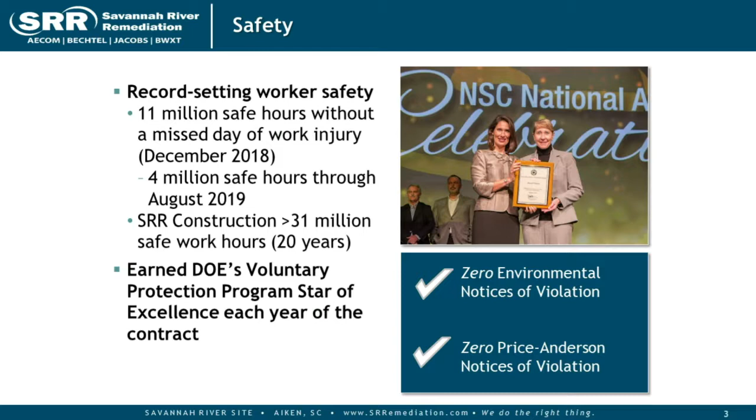This is your placemat. So I don't want to make James a liar. It's in my presentation.

So this really is our mission. And our mission is really these waste tanks, the management and oversight and the safety of those. We store 35 million gallons of high-level waste. That's a product of fuel dissolution from the canyons that was done during the Cold War. Our goal is to take all or almost all of the radioactivity from those 35 million gallons of waste, high-level waste that we store, and try to get it in glass. The most safe waste form that we have.

It's not a perfect process, so some of it will stay in the tanks and be closed with the tanks, and some of it is kept with the liquid form and will be disposed of as a grout in the saltstone facility. But that's basically our mission, is safely storing it, removing the radionuclides, and putting it into glass.

So 51 tanks were built in the history of the site, starting with the first tank being put into service in 1954. 8 of those tanks have been taken out of service and formally closed, 6 of those were grouted and closed under the current contract we have. That leaves 43 tanks that are operational and in use in the facilities for processing.

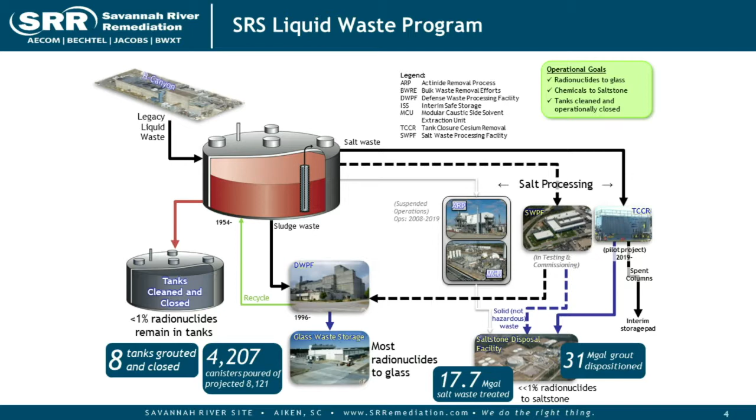The second part of the process is what we call modular caustic side solvent extraction, or MCU. That's a liquid-liquid extraction process that uses a couple of chemicals to actually grab hold of the cesium, remove it from the radioactive material, and that concentrated solution goes on to DWPF for placement in glass.

That process was just shut down this past year. It's all in preparation, getting ready for SWPF, because all the lines we use for MCU and ARP now have to be attached to the salt waste processing facility. So that's our big focus right now, getting ready for SWPF.

SWPF has exactly the same function as ARP MCU, except it's really supersized. Whereas this facility produced anywhere from 700,000 to 1.3 million gallons of decontaminated salt solution every year, you can expect SWPF to do 7, 8, 9 million gallons a year once it gets up to full operation.

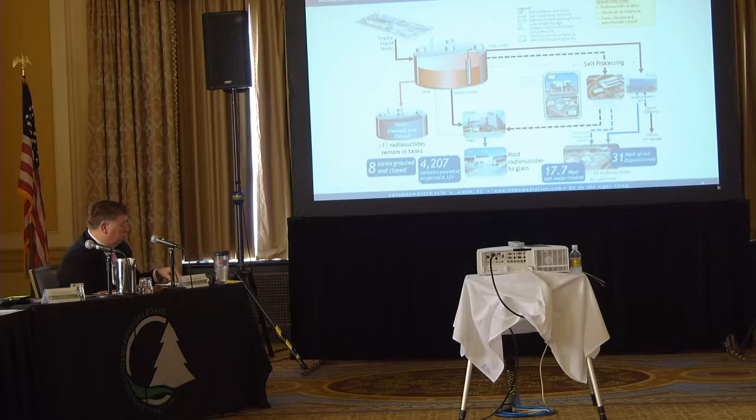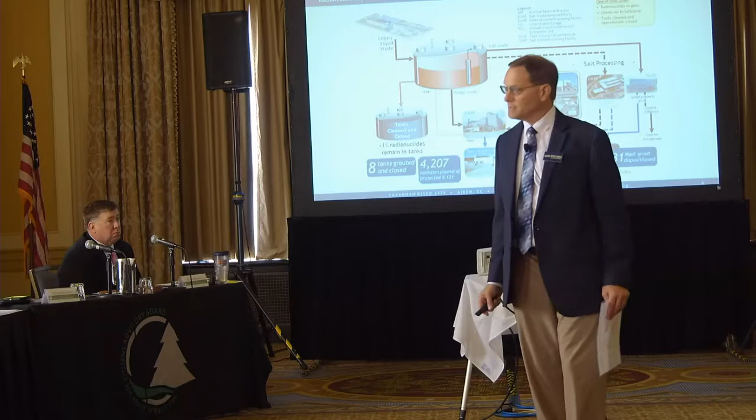As an alternative to both liquid extraction processes, MCU, ARP, and SWPF, we just this year started up a test bed using an ion exchange resin called CST, or crystalline silicon titanate. We have way too many acronyms.

The ion exchange resin grabs hold of the cesium and removes it much in the way the liquid-liquid extraction process does. We're putting it on that resin and getting a decontaminated salt solution, which also goes on to the saltstone facility. For the time being, our plan is to store that resin on site.

Eventually it will have one of two paths, probably. The resin will be sluiced up and put into the DWPF glass, or if possible, if it would be considered a low-level waste, it could be shipped off-site to a low-level waste repository. That's a potential.

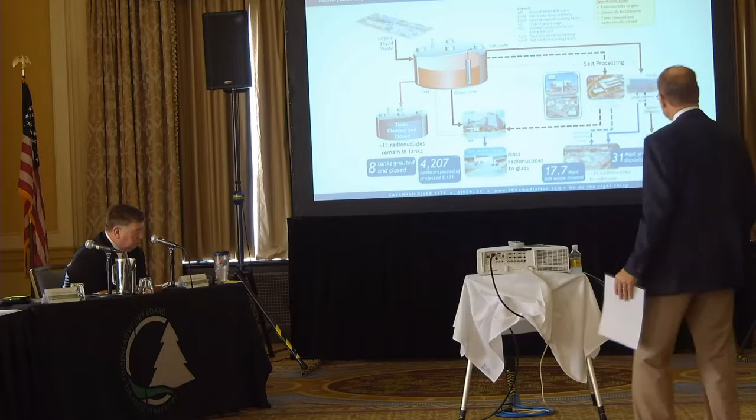So some might ask, why are you doing this? Being an ops guy, it is always best to not put all your eggs in one basket. It's good to have multiple options for processing material, particularly in the radioactive waste business.

There have been 4,200 canisters produced to date. The projection to finish the program is just about 8,100, so we're basically halfway through the operational life of DWPF, if you will.

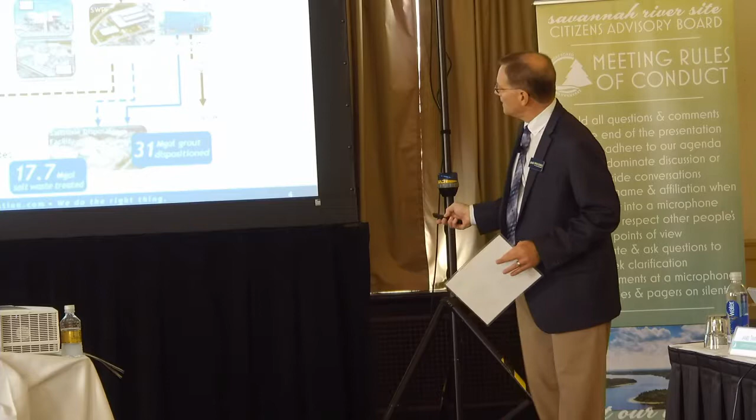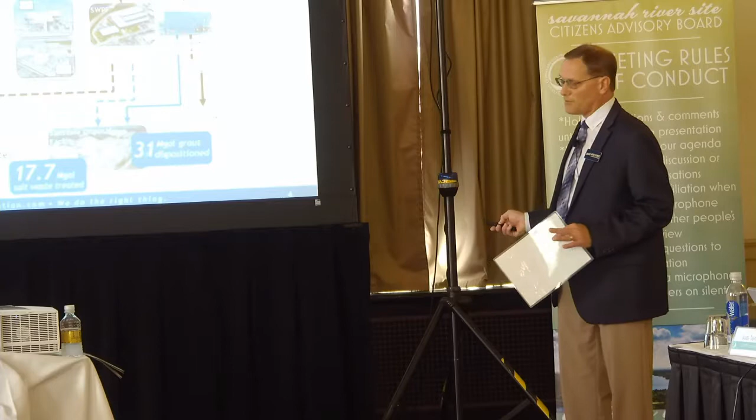The glass canisters are stored in the glass waste storage building, I'll talk more about that. The decontaminated salt solution goes to our saltstone disposal facility. We've processed over 17 million gallons of salt that's put into a grout form, and that 17 million gallons of salt solution becomes about 31 million gallons of solid grout.

The first facility I'll give you an overview on is DWPF. As I mentioned, it's produced 4,200 canisters, about 1,460 under this particular contract, and poured over 6 million gallons of vitrified waste. During this contract, we've had a year of about 330 canisters of glass poured. So that's the production capability of DWPF.

That was mostly a sludge-only feed. Mike mentioned that we've only processed 35 canisters this year. There are big reasons for that. Most of the year has been an outage year, getting ready for SWPF tie-ins. And we're also in a phase where, since we've processed so much sludge, we want to match the remaining sludge with the remaining salt feed that we have.

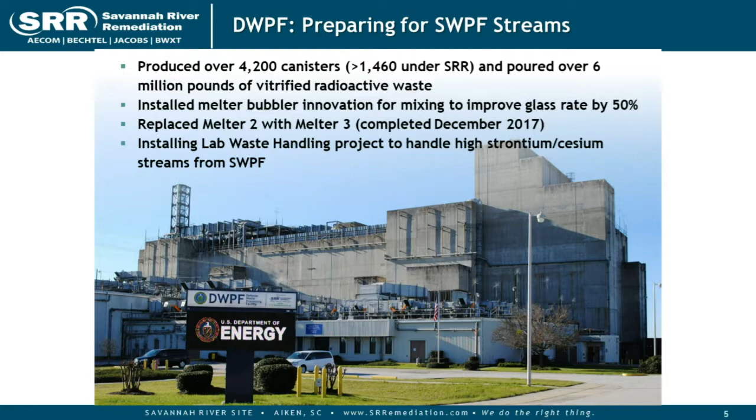So we want to do that side by side with the same amounts of material so that we maintain the glass formulation and glass quality we have. If the salt gets too far out of kilter with the amount of sludge we have, we would probably have to do a slightly different glass frit formulation. So that's the reason for slowing down, to make sure we have enough sludge to match up with the salt feed we've got.

The biggest innovation over the last 10 years was the installation of the melter bubblers, and that's what got us to 330 canisters a year. It's a very simple idea: you take argon and bubble it down into the glass pool, which gives much better mixing in the melter and a much better melt rate, giving you a much better pour rate and getting you canisters faster. That was very simply done, and it was a very inexpensive addition to the melter.

And we change those out on a regular frequency to keep them viable.

There are multiple projects that we're doing in order to get ready for SWPF. I'll cover those real briefly. In our agenda, we've got a couple of presentations that will talk a little bit more about that. But we have the DWPF modifications project.

When you bring all that really concentrated cesium and strontium stream into DWPF, you have to be able to handle that. Anytime you bring a radioactive stream, radiation causes water to decompose. It's a very slow process, but it causes water to decompose, and you get hydrogen and oxygen. The hydrogen has to be removed so you don't have a flammable gas in your process, so you always have to have an air purge going. To handle this higher cesium and strontium concentration, we have to increase the air purges through our vessels in DWPF. That project did that in preparation for SWPF.

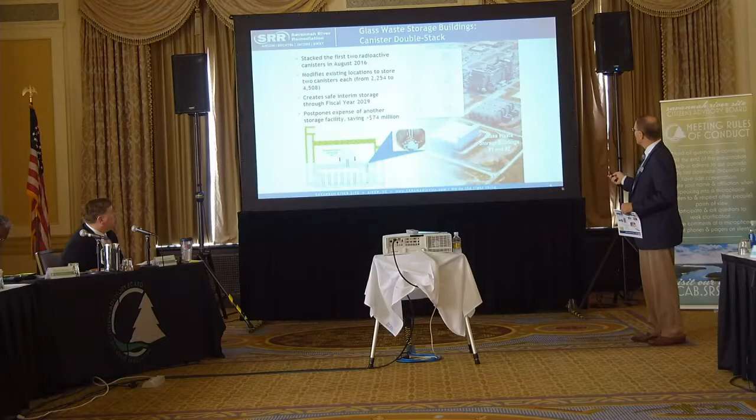Double stack is an innovation within itself. Here's DWPF, here's glass waste storage building number 1, and here's glass waste storage building number 2. In the original DWPF design, there were actually spaces designed for as many as 3 more buildings out here, so they designed it for up to well over 10,000 potential canisters.

We came up with a way to take the current design, which has 1 can in each slot, and there are about 2,500 spaces in each of the buildings, and actually put one can on top of the other. There's just enough room to do that and get the right amount of shielding on top. So it's a very simple thing we did, and we basically doubled the storage space in this building. Rather than having to build a new $130 to $150 million facility, we're able to save about half that cost and use that money to redesign each one of these so each hole can take 2 cans. We've saved over $74 million in taxpayer money with just that idea.

We're further looking at whether we can double stack in glass waste storage building number 2. However, it is a slightly different design. When they built it, they tried to reduce cost a little bit, which was a good idea at the time, but the building is about 8 inches shorter in height, which makes it very, very close when you go to double stack it. So we're looking at innovative things like maybe having a uranium depleted shield plug that would go over the second canister, so you wouldn't need a very big plug to shield it from the radiation. We think we can do it, but there's still some work to be done there.

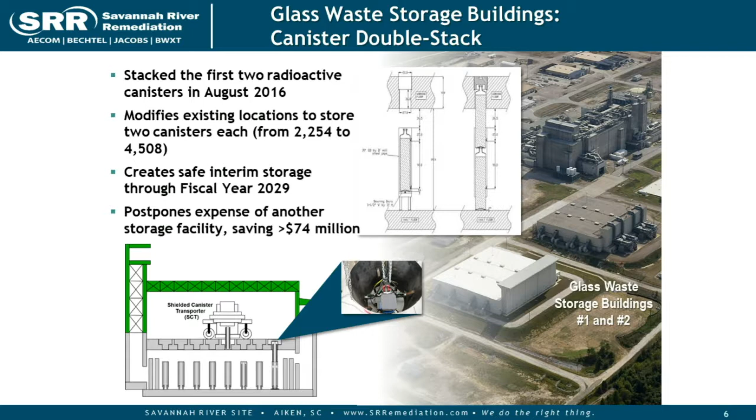ARP MCU has piloted everything that SWPF will do. All the processes in SWPF were done in ARP MCU, so everything in SWPF should work very well. It's not like starting up a first-of-a-kind facility in the Department of Energy complex.

It processed over 7.4 million gallons over its life. It was designed and built with the idea it would be a pilot facility operating for about 2 to 3 years. So we put 2 major life extensions into it to get the current operating life we got out of it, 10 to 11 years. To go any farther, we would have had to have another major shutdown and life extension to get another couple of years out of it.

So we thought at this time with SWPF so close, it's best to go ahead and shut it down, save the dose to the individual workers that would have had to refurbish it and bring it down, and declare success. So it has been a very successful campaign for ARP-MCU.

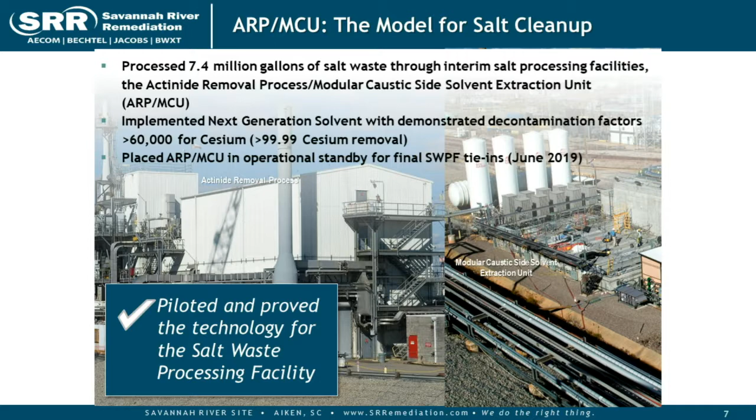The biggest innovation for ARP-MCU was changing the solvent to what was called the next generation solvent. We have a molecule, and I like to describe it, I'm a chemical engineer by background, but if you look at its physical shape, it looks like a baseball mitt. The cesium ion, it actually catches it in the mitt, and then you extract it later and put it in DWPF glass. So it catches it like that.

This calix molecule, as it's called, there's a new and improved version. We had what we called BOBCalix, and they went to something called MaxCalix. So instead of having DFs, decontamination factors, the amount of cesium you remove versus what's left behind, of 150 to 200, we improved the decontamination factor to over 60,000 with this new extraction process. That's over 4 nines removal of cesium from the radioactive waste.

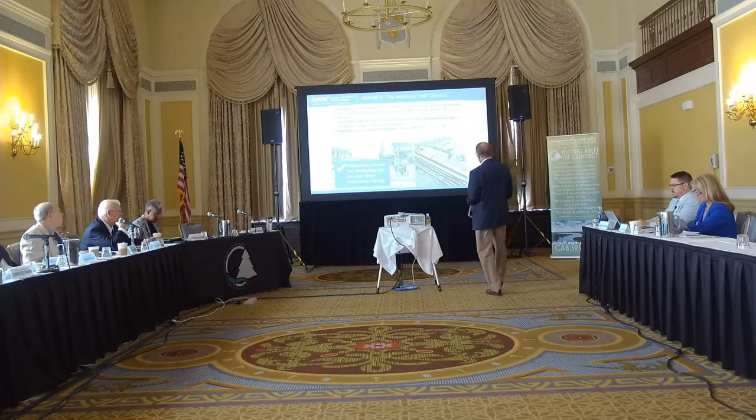So that's a very good innovation. We have officially placed ARP MCU in operational standby. It is still available for operation, however all the lines have been disconnected and now connected up to SWPF. So if something were to go seriously wrong with SWPF, we could reverse that process and hook it back up, but it would be quite an effort to get it back to that point.

This gives you a history on ARP MCU. I know this is probably hard to see from the back of the room, but originally the technology was designated in February 2004. In just over 4 years, the process started hot operations, which is outstanding for the DOE complex. It processed in total, as I said, 7.4 million gallons. And I think Mike mentioned in his opening comments that we celebrated 10 years in contract, and we also celebrated the successful operation of MCU.

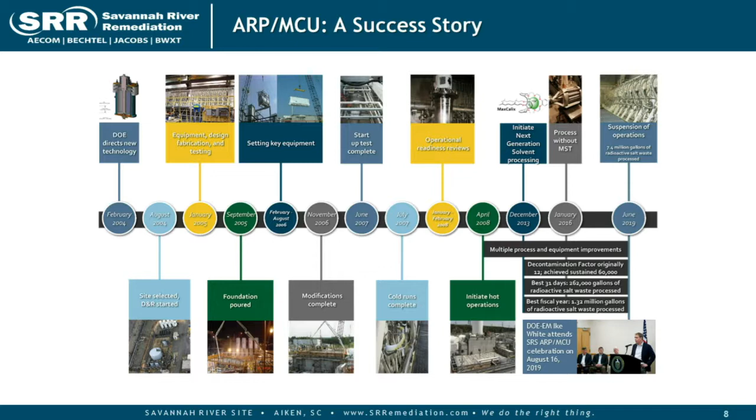Ike White, the EM advisor, was here to help us celebrate that.

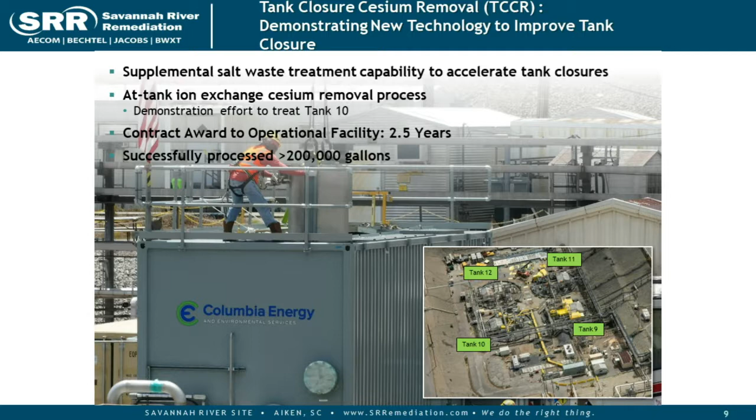So I mentioned TCCR, tank closure cesium removal, we call it TICR, is an ion exchange process. It duplicates some of the technology that was used to clean up wastewater at Fukushima. Ion exchange is a fairly mature technology; the resin is a fairly new thing as far as being used in nuclear service. Again, it's crystalline silicotitanate. It is an expensive resin, so you want to get as much cesium on it as you can.

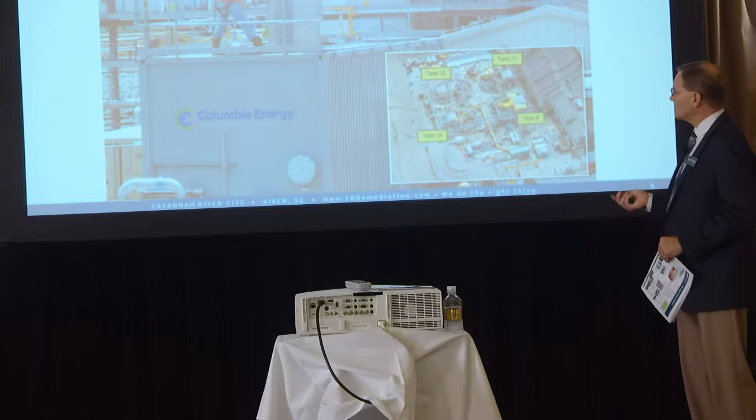With the technology as it developed at Fukushima, we felt we could bring something right to the side of the tank. So we had a vendor design this, what amounts to a Sealand container, designed it at their facility, brought it here, placed it directly beside the tank, and are pumping from the tank high-level waste through the resin columns, taking off the cesium, and sending the decontaminated salt solution to Saltstone.

From the time the requisition was placed to the time we actually put it in service was less than 2.5 years, which is again, for the DOE complex, a very, very outstanding turnaround time. And we've processed over 200,000 gallons of radioactive waste with that material.

Now, again, as Mike said in his opening comments, the system has worked very well, and you'll hear a little bit about that later. What we've had problems with is tank 10, the one we're trying to dissolve the salt in, which had gone through several dissolution campaigns in the past.

So a lot of the really soluble salt has been removed, and we're finding it very hard to dissolve up this salt. So we're putting a new transfer pump in it to run the rest of the material, and we're also going to put a couple of mixing pumps in that tank to churn up all that material to finish the final heel removal in that tank.

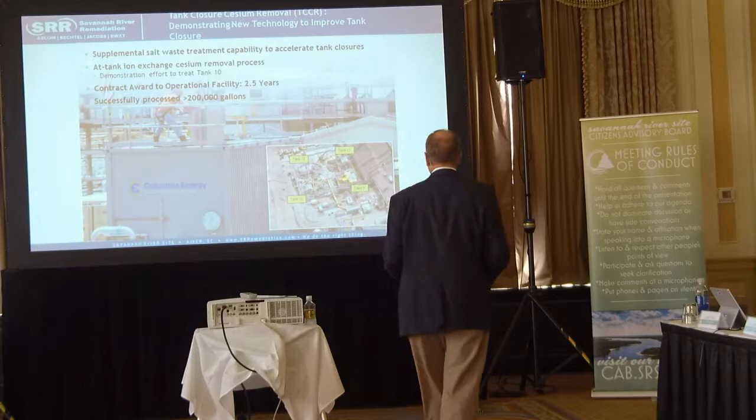I think the last time you had an overview was about 18 months ago from my boss, Tom Foster, and he spent quite a bit of time talking about 3H Evaporator. 3H Evaporator is one of our workhorses for removing water from the system.

We had a failure of that unit back in early 2016. What happens is evaporators, to get good evaporation, not only have their steam coils in them, which is right here, but they have air spargers in them. And these air spargers make sure the fluid's being mixed and make sure no solids build up at the bottom of the cone.

Well, this particular vessel is the only one we've got made out of Hastelloy. Hastelloy is extraordinarily good for corrosion, and that's why you get it, but it's a little bit softer than normal stainless steels. So it actually eroded part of the bottom of the evaporator out.

So we went through, working with Areva, a lot of remote technologies for putting a new bottom on this, which worked very well. But then we found two small defects that also were leaking. After discussions, making a presentation to the department, they agreed we could put that vessel back in service with the proviso that we go order a new one, because we needed that vessel to keep our liquid volumes down.

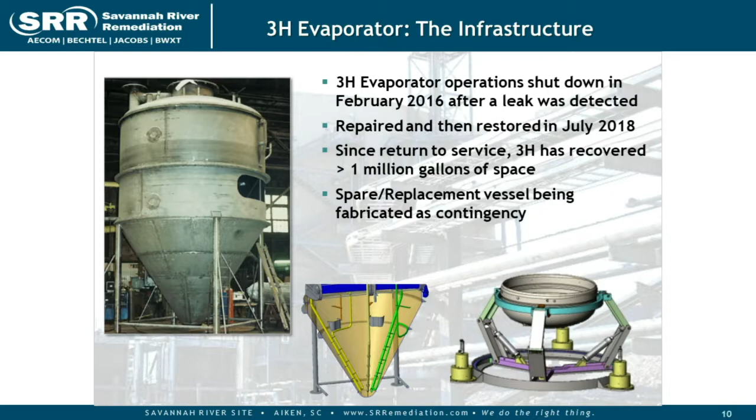We have a vessel on order, and that's good, but 3H has been a real workhorse and worked very well with no increase in those very, very tiny leak sites. In fact, you just barely see a little bit of salt pile up. You really don't see any water coming out of any of the holes. And so we processed almost 1 million gallons in this fiscal year with this vessel, and about 1.6 million gallons total through all of our evaporators. So it's been a very successful year from an evaporator point of view.

Aaron Stopp, who works for me, is going to give you a presentation on some of the innovations we've done. But one of the things you have to do is get all those feed materials, which includes cement, fly ash, and slag, suspended, and air convey them over to the grout hopper.

We've installed 3 brand new compressors, because the original compressors installed there were from the late 80s. So they're bigger, they handle a lot more air, and there's 3 of them instead of 2, because we have 3 components and we need to slurry up all 3 at the same time to have the highest production rate that we possibly can. And we need a very high production rate out of this facility.

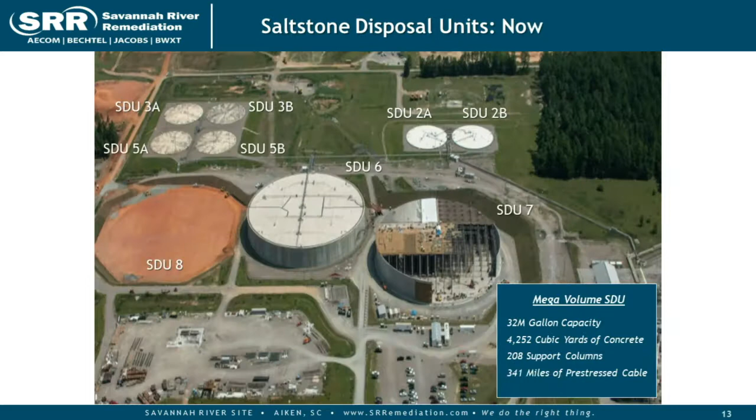We originally were building the SDUs in what I'll call the small size. We didn't think they were small at the time, because these are 150 foot in diameter, 22 foot tall, hold about 2.8 million gallons of grout. They're commercially designed water tanks, the kind a city water system might have on their clean water side or wastewater side.

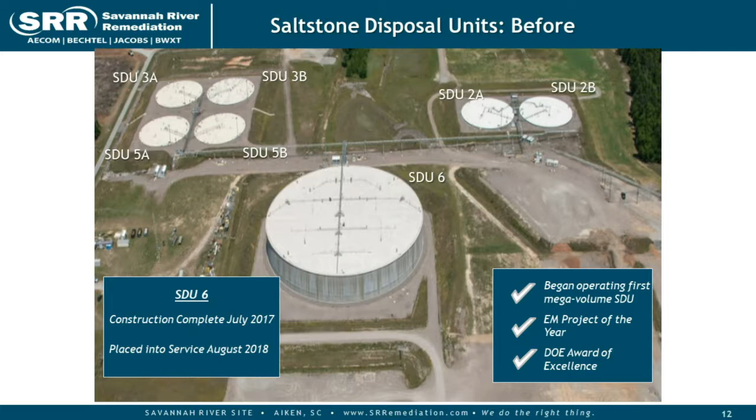When you realize that you have to eventually dispose of probably 200 million gallons of decontaminated salt solution, you recognize that you have to build 80 or 90 of those.

So we got smart, and the largest available commercial design in normal production is what we call our mega SDUs. It's a 32 million gallon tank, 375 foot in diameter, 43 feet tall. It's big enough to hold a football field or a baseball stadium if you needed to, and it'll hold over 32 million gallons of grout.

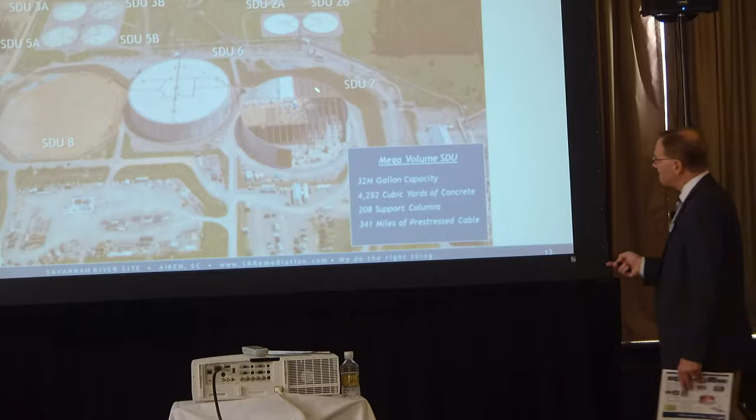So rather than building 88 of those, we're building these. When Tom came and spoke to you 18 months ago, we were just finishing that one up. Since then, we're this far into building SDU 7. It's 25 walls, 11 floor sections, 7 roof sections, and over 208 columns that go into this.

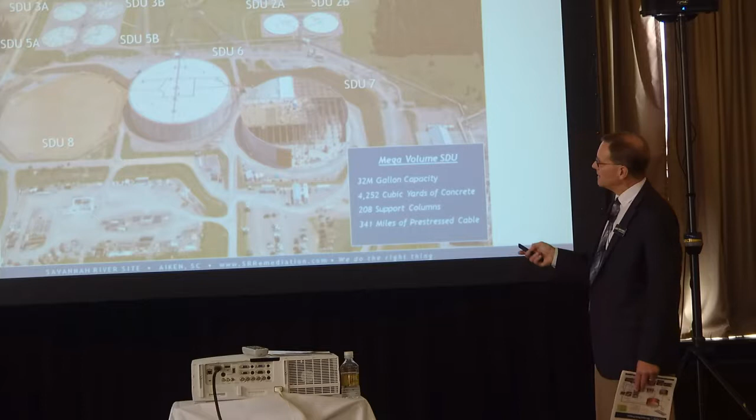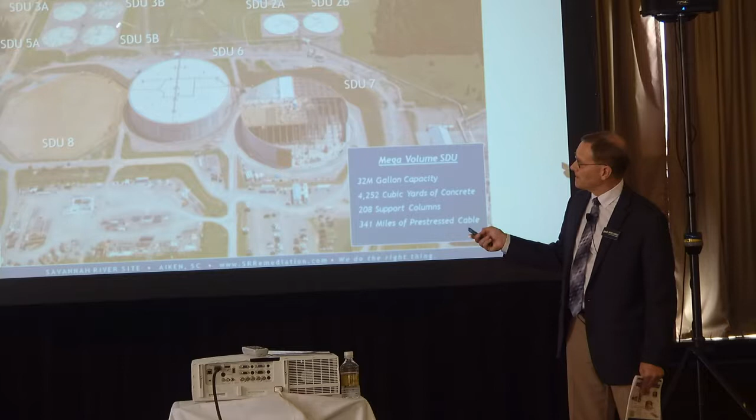I'll also point out that when we built this 4-pack, which in total gets you about 11 million gallons of grout volume, when you compare it to the cost of one of these, building 4 of these was the same cost as building 1 of these. You get 11 million gallons of grout capacity with the 4-pack for the same cost as 32 million gallons of capacity with this one. So you're getting 3 times the capacity for the same price. That's why we went this way.

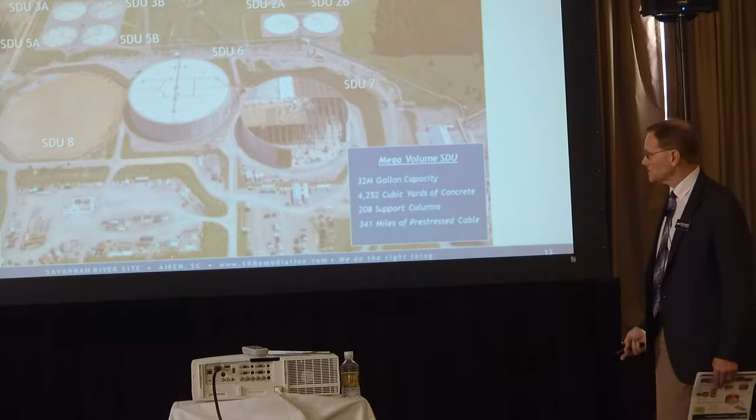You can see in the picture that we've already started the work on SDU 8's position. There's already a mud mat in place for this. And if I had the latest picture, you'd see that same cutout for SDU 9, which will go here. All in preparation for SWPF and the large volumes coming out of it. Eventually, it will all look like that, and we believe that will handle all of the decontaminated salt solution. That landfill, when it's all finished, will be capped and closed.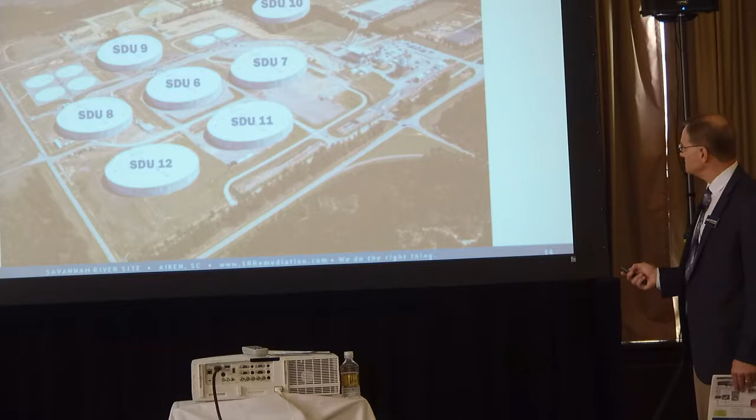So just a couple more slides. You might have seen this one before - this is the gear chart, as we call it. SWPF compared to MCU ARP, as I've said, is a much higher capacity. So it's not just another gear coming in, it's a very large gear coming in. And everything else in the liquid waste program has to run faster at a higher capacity than it's ever run before. I want to show you a couple of things that come out of that.

First, let's see how does that show up from the back? Probably not too well. This shows you most of the liquid waste program. This is generally true north here. This is the Saltstone facility. You can see a couple of the small SDUs, and SDU 6 would be right behind that.

Right here is the Defense Waste Processing Facility. Here is SWPF. Here, just for a point of reference, is H Canyon with HB Line on top of it. And then laid out here in front of you is H Tank Farm, about half of it. Two other important buildings I want to point out are what we call Low Point, or 511S and 512S. They were two small buildings built between tank farms and DWPF, particularly for pumping sludge, which is very thick. You have to pump it to one point, put it in a tank, pump it up to that point, put it in a tank, pump it up from that point, and put it in DWPF.

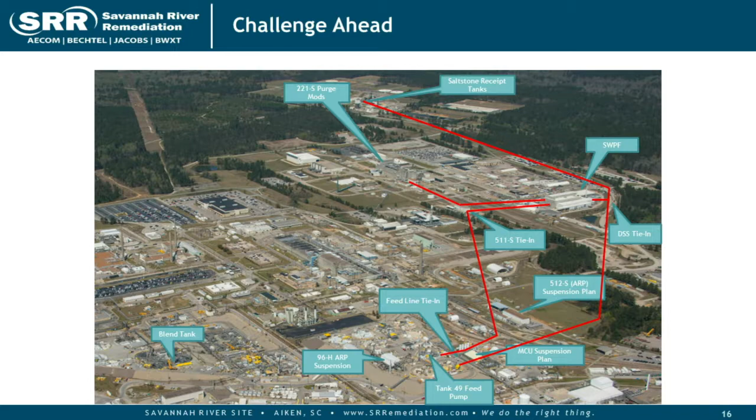We've tied in here at Tank 50, which transfers DSS to Saltstone, and also will take DSS from SWPF. And we've tied in here also. So 3 major tie-ins have been completed: purge mods, salt receipt tanks, and we've also placed ARP MCU in full layout. This is just that same view rotated about 90 degrees that shows you where all those major tie-ins were done.

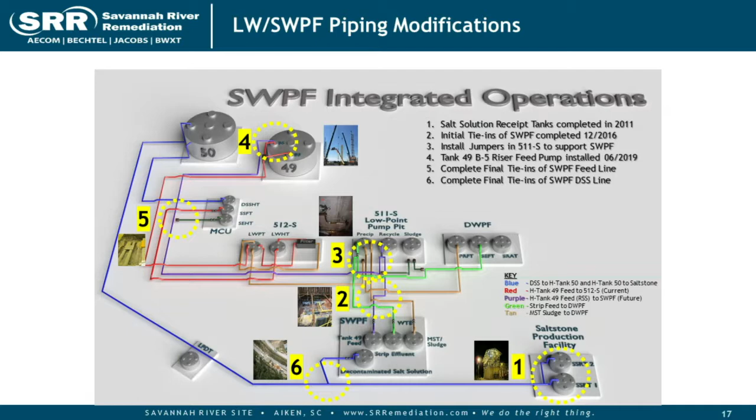All right, there may be a test, so...

One other big point I wanted to make is once you get it tied in, there's a whole lot of management that has to go on in being able to get ready for SWPF. This is an example of trying to get the first 3 million gallons ready, then 6 million gallons, then 9 million gallons a year ready for SWPF.

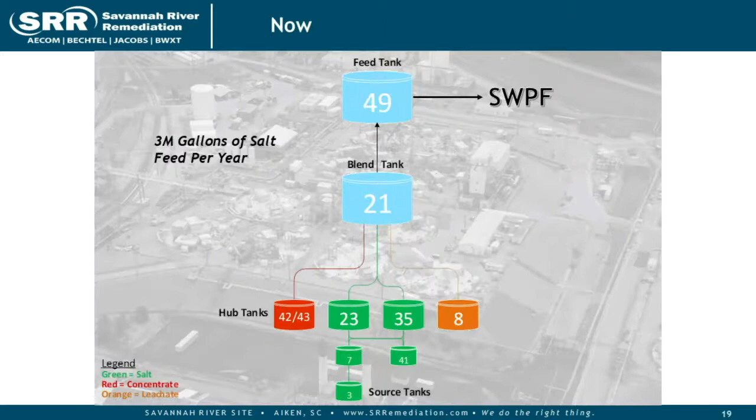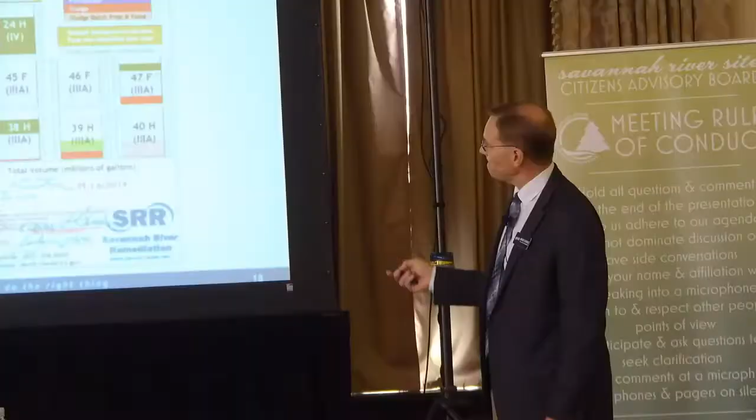Tank 49 will be the SWPF feed tank. The next one after that is tank 21.

I apologize for these colors not showing up as good as I would have liked. These red lines indicate some sludge in the bottom of several of these tanks. Everything else is some form of material that needs to go through SWPF.

Some of it is in liquid form, dissolved salt. Most of it, which you can see in this pinkish color, is undissolved salt - it's salt cake. So most of it is in a hard salt that has to be dissolved.

And when you dissolve salt, it takes about 3 times as much water - if you dissolve 1 million gallons of salt, you're going to end up with 3 or 4 million gallons of salt solution. And there isn't a whole lot of room to put it anywhere.

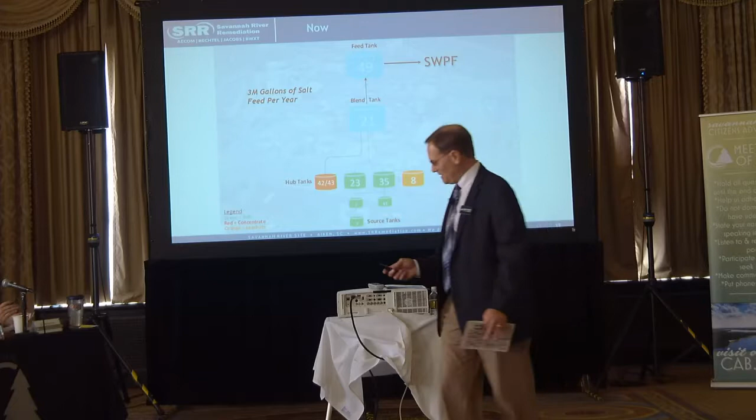So you have to break some eggs. We have to get SWPF started up, take that material off to free up room for the next set of tanks. The way that'll be handled - this one's a different color scheme, so I apologize - is we're set up right now with 49 as the feed tank and 21 as the blend tank.

We have 1 million gallons of salt solution ready to go. It's been sampled, the paperwork's all been completed. We're going to turn it over to Parsons and the DOE to approve it as the first feed batch for SWPF. So 1 million gallons ready to go.

21 has 1 million gallons of SWPF ready feed made up in it, ready to go. It's been sampled, SRNL is doing the analysis on it. When we get those analyses back in about a month, we'll put all the paperwork together. There'll be 2 million gallons of SWPF feed ready.

The rest of the feed material comes from some of these tanks. And to be able to do that feed, every one of those tanks has to have a transfer pump to get it to tank 21. Tank 21's got to have a transfer pump and a blend pump to get it to tank 49. 49's got to have a transfer pump to get it to SWPF. So there's a lot of infrastructure that has to exist.

Some of these tanks will require 3 mixing pumps, and each mixing pump can cost anywhere from $800,000 to $2 million to install on each and every tank, and in some cases you need 3 of those. Eventually, to get up over just maybe 3 million gallons a year, you have to have 2 blend tanks.

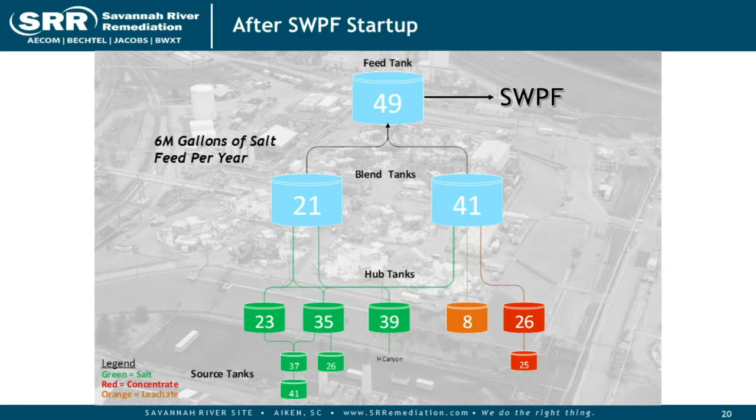This configuration we're in now. This configuration we plan to be in 6 to 8 months. And this configuration is somewhere between 12 and 18 months away.

Again, I want to emphasize the importance of the infrastructure behind all those tanks. All those tanks need multiple pumps to be able to support the amount of salt that we need.

So let me close my talk. Summary.

ARP MCU is a big success story for us. It ran over a decade on something that was planned to go for 2 or 3 years. It processed over 7.8 million gallons of high-level radioactive waste. So we're very pleased with its operation, and we're happy to have placed it in a safe standby state.

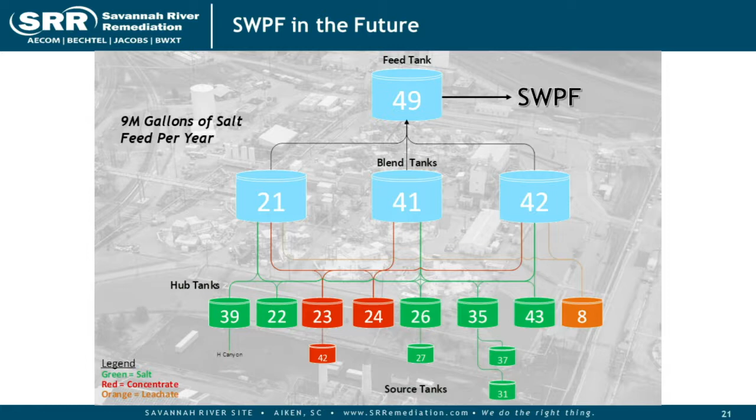The SDU construction, as you can see from those pictures, is going very well and will fully support the SWPF mission when it starts up. Our core function is focused on us being ready for SWPF when it starts up.

So you saw all the information I had on the tie-ins and all the facility improvements we're doing around it to get ready for the very, very high volume that will be coming out of SWPF, including the piping for all the tie-ins, which is complete. The electrical work is ongoing, electrical checkouts are ongoing, and we're expecting to be fully ready, declare readiness for whatever and whenever SWPF starts up.

We'll be ready by Thanksgiving of this year. And then, as I showed you, we'll, in a phased way, work up from 3 million gallons a year to 9 million gallons of feed and DSS out of SWPF within the next 18 months.

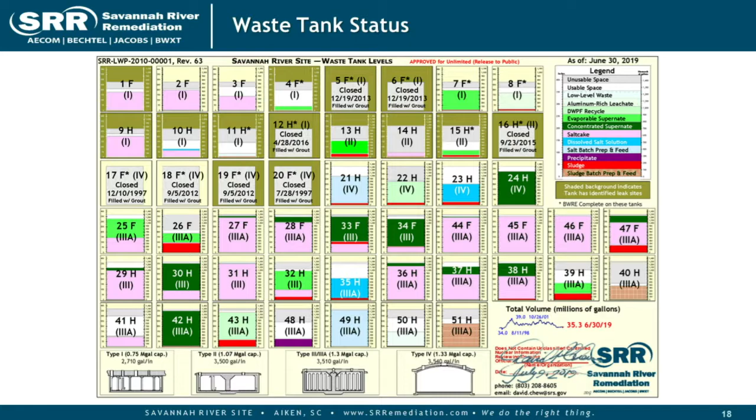Okay, Charles. Charles Hilton, CAB. Thank you for this presentation. It's fascinating.

Page 6 talks about the double stack canister storage. One sentence that jumped out at me: create safe interim storage through fiscal year 2029. That's 9 years from now. It's not a whole lot of time. It goes back to long-term storage. Is this something that is just a political decision that's going to have to be made?

Well, the canisters for final disposition need a federal repository, and that was to be Yucca Mountain. That's to be determined now. So until there is a federal repository, they're likely to stay right there. Okay.

Maybe the concern is safe storage through 2029—I'm assuming the safe storage is forever. It means we have enough space through 2029. It'll be safe forever. Okay.

Not forever, but for an extended period of time. You do want these canisters eventually in a repository somewhere. Yes, we do.

The future picture of this would be a grass-covered hill. So you'll have to get all the dirt to cover all those up. And they're actually dug into the ground—they're about half below grade level. But you'll put a dirt cap, probably a lined dirt cap, depending on what permit process we go through with the state, a lined cap that will cover that entire area.

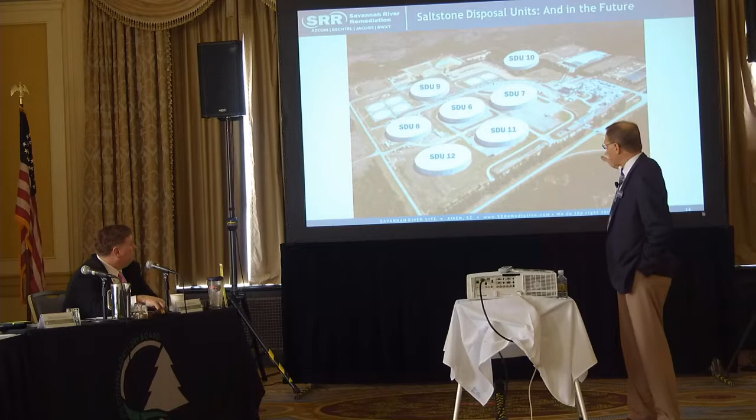Thank you. Okay, Dan?

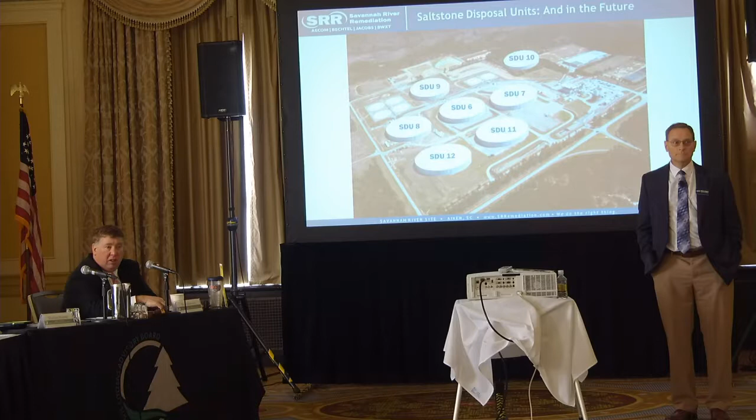Dan Kaminsky, CAB. On slide 18, just the asterisks on the tank numbers—it says it's BWRE complete on these tanks. What does BWRE stand for? In the FFA, there's a term called bulk waste removal.

That indicates when we have - it's not a well-defined term - but the majority of the waste removed that's easily removed. So in tank 10, I think we've removed the majority of the waste that's easily removed. So we're trying to declare bulk waste removal complete on tank 10. You have to put larger pumps or some other different technology in there, and that's really the key point - there's a transition of technology to get the final dregs out of the tank.

Is that bulk in volume or radionuclides? Yes, both.

Betty Cook, CAB, thank you very much. It was a wonderful presentation. And I have a question that's off the chart here. We're talking about processing, receiving, storing, but where are we receiving this waste from, and are we currently receiving waste?

There is very little influent into the high-level waste process right now, and there won't be any in the future, of significant volume. Almost all of this volume comes from the startup of the canyons in the early 50s, processing during the Cold War, that was completed in the early 90s. We have a small volume that we still get from H Canyon that goes into the system. It's a very small amount - less than 200,000 gallons a year, and I think it averages less than 100,000 gallons a year. And we evaporate that down so that it's a very insignificant quantity.

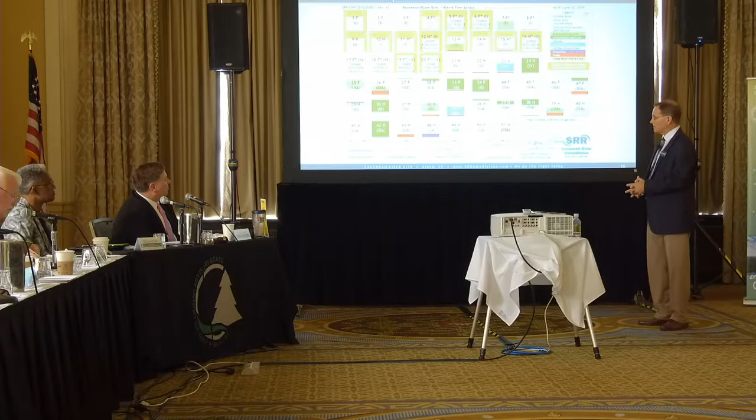Any guesstimate of a timeline? I can look in the system plan and see when we put them in. Fine, I don't have it off the top of my head.

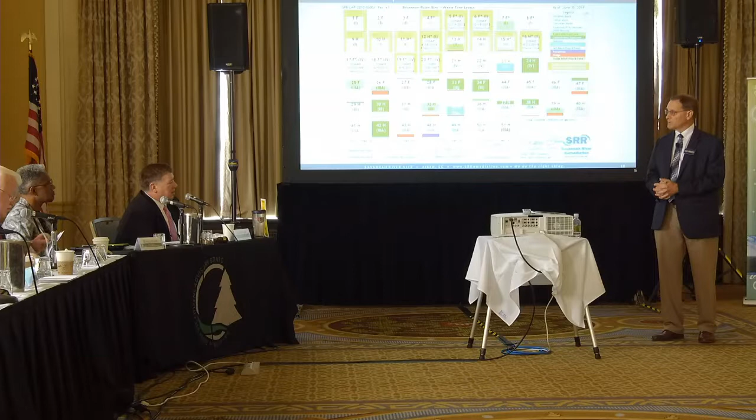And then I had a second question, and it may be an SWPF question - so SWPF is going to be able to process 9 million gallons a year? That's the goal, that's the goal. And I believe the last baseline value is about 7 million. One of the issues the CAB had when SWPF was being discussed was whether you were going to be able to provide the feed, the waste, to actually have SWPF run. Do you still feel confident you're going to be able to provide 7 million gallons a year? That was really the key point among these three slides.

We've got 2 million ready. We'll have 3 million in short order, and when I go to those blend tanks, 2 blend tanks, I'll be able to switch back and forth with all of that salt that's available. Should be no problem. Getting beyond this will be a little tougher because I need to get a third tank open and available. So you see tank 41 actually gets promoted - we need to get all the salt out of it, moved to other tanks, and then it'll get promoted to a blend tank, and we'll be able to go back and forth between those.

And then 42, we get all the salt out of that, it gets promoted to a blend tank, and we'll be able to probably pretty easily keep up with 9 million gallons from the blend tanks. We've got to be able to dissolve it out of these tanks, which means we have to have at least 3, if not 4 pumps in each and every one of these tanks to keep up with that. That's where my biggest concern is, making sure we have the money in the infrastructure of pumps to be able to get those.

And this is what you're driving for by Thanksgiving? By Thanksgiving, we'll be ready to feed SWPF. Okay, all right, so great.

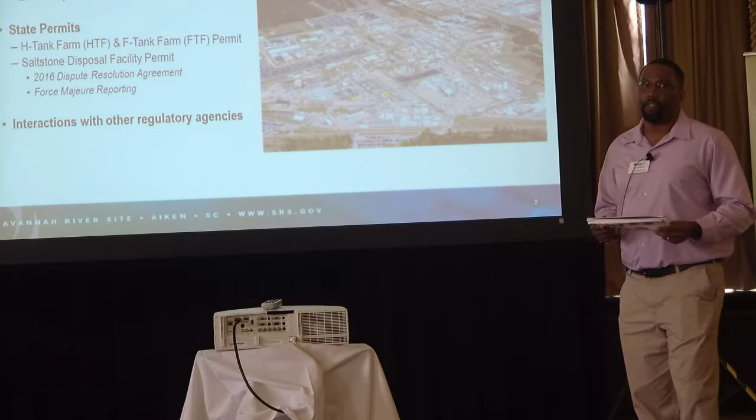So for the outline of my presentation, there are two big umbrella regulatory documents or frameworks that we operate under. The first one is the FFA, or the Federal Facility Agreement. The biggest thing that happened this past year under the FFA was the suspension agreement, and I'll get into some detail about that and some history associated with it. The other large regulatory framework we operate under are our state permits, and there's a number of permits associated with, in particular, the F-tank farm and the H-tank farm, as well as our saltstone disposal facility. And then at the very end of my presentation, I'll get into a little bit of discussion about some of the other regulatory agencies we interact with.

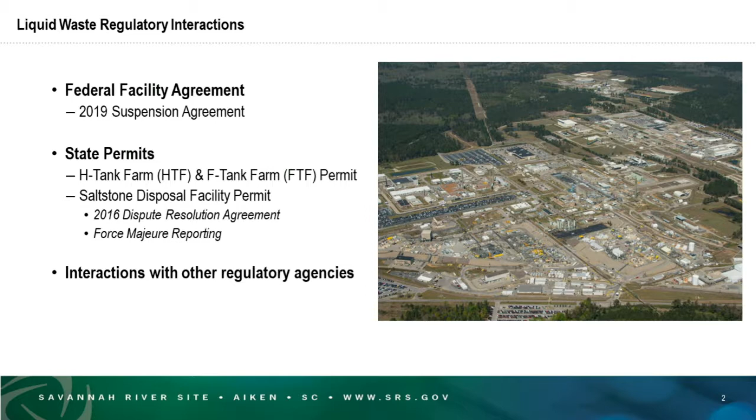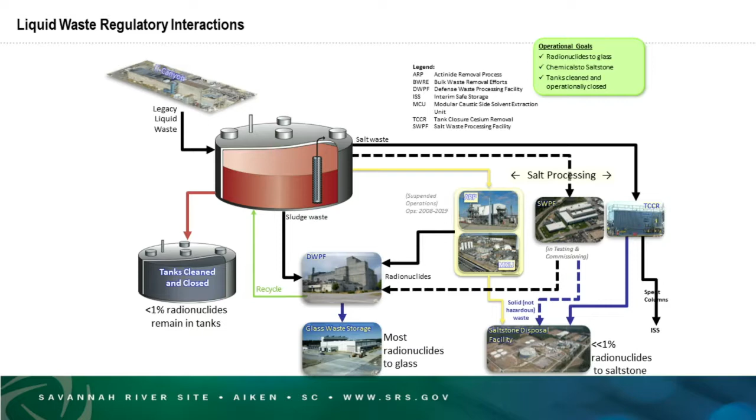As you remember before, this is our liquid waste system, and the key parts that I interact specifically with our regulators are associated with our active tank systems, as well as the closed tanks and our saltstone disposal facility. So, as I mentioned before, our interaction with our regulators is focused on getting to tank closure. We've got to get the waste out of our tanks, dispose of it, and get these tanks closed.

So I put a link to the FFA on the presentation in case anybody's interested. It's a very large document. But the key point I want you all to get out of this is the fact that, in support of our environmental restoration activities at the Savannah River site, the FFA is an agreement between the DOE, the Environmental Protection Agency, or the EPA, and the South Carolina Department of Health and Environmental Control. Those three agencies agreed to, sat down, and came up with the plan to clean up this site.

And a key concept to remember is the fact that the liquid waste program is only a small portion of the cleanup activities that take place at the site. So in order to clean up the entire site, when you look at the whole Savannah River site, you want to view it as a large system, and cleaning up the tanks, cleaning up our salt waste, is just a small portion. Working with our regulators, we've gotten them to understand, and we all understand, that it takes a teamwork effort.

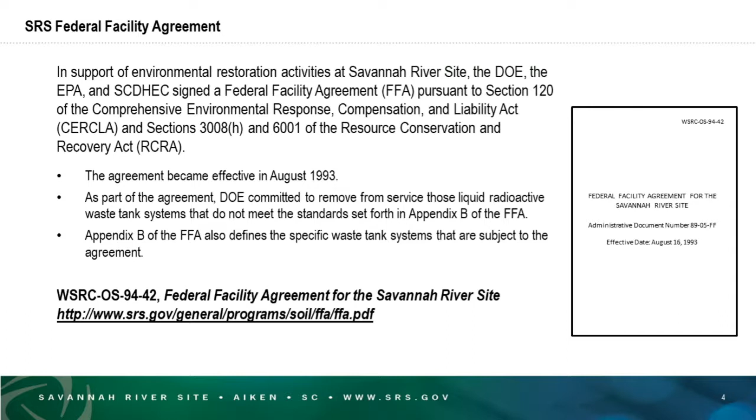Okay, so in 2017, we sat down with our regulators and put together a suspension agreement. This was regarding a comprehensive plan and schedule for closing the old style tanks in the liquid waste system. As a result of a number of issues, in particular the delayed startup of the salt waste processing facility, we decided to put a suspension on all the milestones associated with tank closure. The goal was to set up an aggressive schedule for resetting these milestones based off all the new information and the new liquid waste prime contractor.

However, in 2019, earlier this year, as we sat down at the table and looked at our budgets, and took a look at the fact that the new liquid waste contract had not been awarded, as well as the fact that SWPF still had not started up, we said, okay, we're not in a great position to set realistic milestones that are achievable and will show a lot of progress. So let's suspend all remaining milestones until we have this new information, and keep the plan to pursue a new schedule once the new contract is awarded and once SWPF is in operation. As we do that, we'll set some interim milestones of cleanup goals across the site.

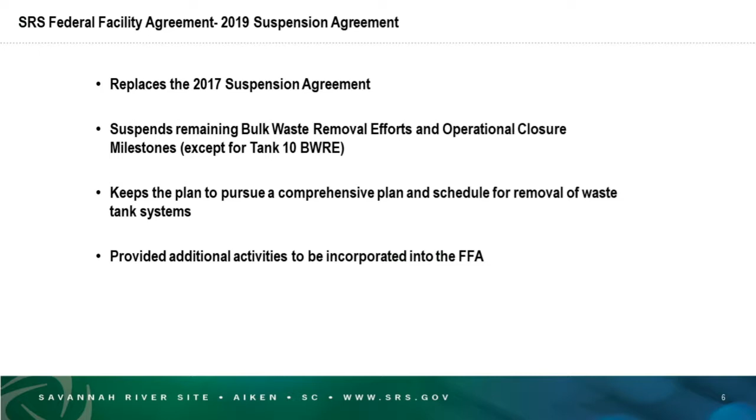So as part of that negotiation, we came up with a number of additional milestones. As I stated before, closing tanks is a high priority. However, just because we're not closing tanks does not mean we're not cleaning up the site, or that we cannot show progress on some of the other cleanup activities at the Savannah River site. So as part of our negotiation with our regulators, we came up with a number of additional milestones that we can include in the FFA and set time limits to make these things occur.

Some of them are shown here. The first is the F-Tank Farm Deactivation Plan, which is a plan to sit down and say, okay, this is exactly what we mean when we say we're going to close the F-Tank Farm. What will F-Tank Farm look like once all the waste is gone and we're handing it over to area closure to eventually put a cap on? Also, because we have not gone through the closure process, what are some of the things on our tanks that we can work through in that closure process?

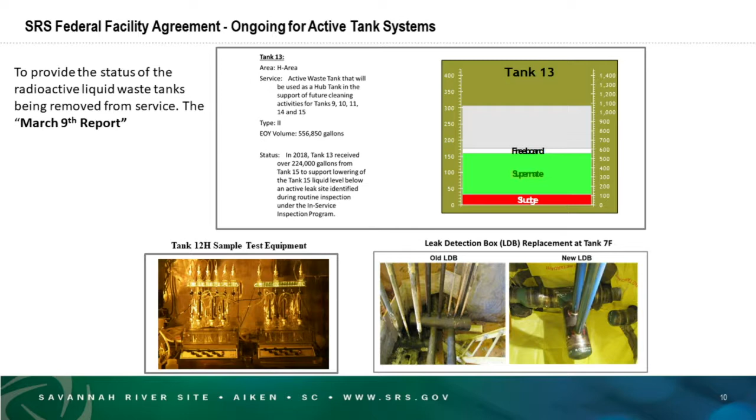This is basically a page out of the March 9th report. As you can see, there's a detailed analysis of how much available space is in the tank, how much salt, waste, and sludge is included.

The previous discussion spoke a lot about the leak sites that were identified in some of the tanks. As part of our negotiation with our regulators, came an annual radioactive waste tank inspection program. This inspection program is set throughout the year, where we do tank integrity analysis as well as leak site inspections to determine.

So not only do we do these inspections for the active tank systems, but we also do inspections of our closed tank systems, where we take a number of pictures and compare them over the years or from the past year to determine if there's any change, or if there are any maintenance activities necessary. Over the years, South Carolina DHEC as well as the EPA have participated in these inspections as well.

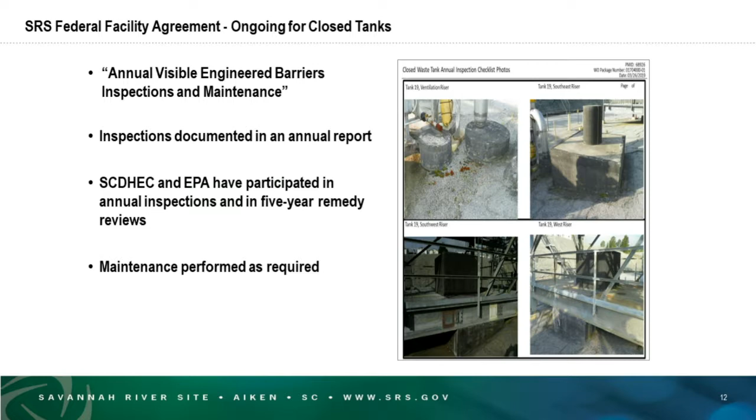Okay, so that was a lot of information about the things that occur under the FFA.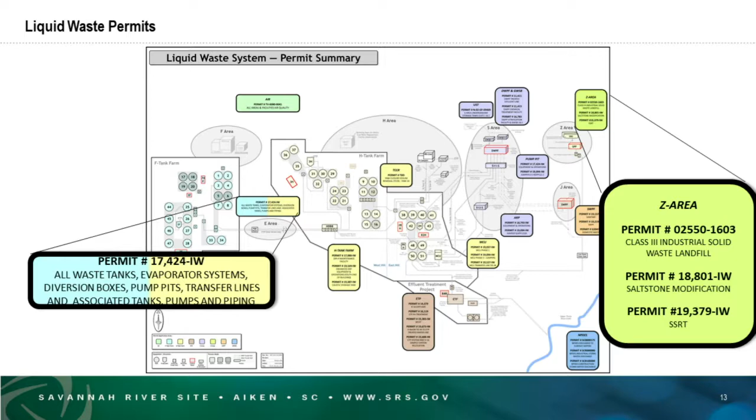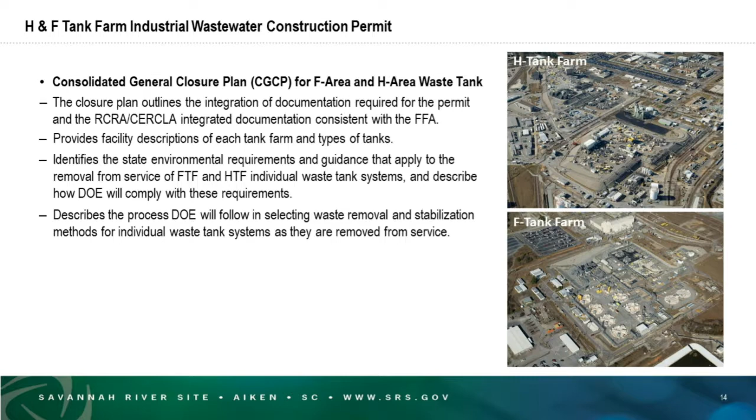As I mentioned before, our goal in the liquid waste program is to close tanks, and the permit describes the process we use to do that. The Consolidated General Closure Plan is the document that was agreed to with the regulators to identify the state environmental requirements and provide guidance to remove what we call in the permit and the FFA 'remove from service.' Remove from service basically means to close our tanks. So the Consolidated General Closure Plan describes the process for closing these tanks.

Once all of that's done and we've got regulator agreement, then we move to isolation, which is separating that tank from the rest of the liquid waste system, residual sampling, getting all the analysis necessary to properly understand what's being left in the tank, and that what is left can be kept protective over the years. Then we get to operational closure, which is grouting.

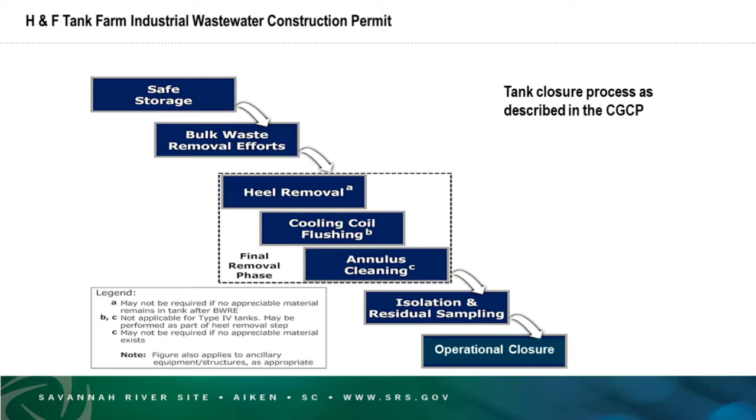So all those are associated with the F-tank farm and the H-tank farm permits. Under the saltstone disposal facility landfill permit, there were specific conditions related to reporting what's known as the inventory, which is what's left in the tank, as well as initiation of the ARP MCU facility and initiation of the salt waste processing facility, or SWPF.

DHEC and the Department of Energy went into a dispute over that last special condition, but what came out of it were what's known as the supplemental tank closure activities, of which this was one. There was also an agreement to process 36.75 million gallons of liquid waste between 2016 and 2022.

That was a very optimistic goal for processing, and we all knew that. So as part of that agreement, we included reduced processing rates where justified and approved by DHEC.

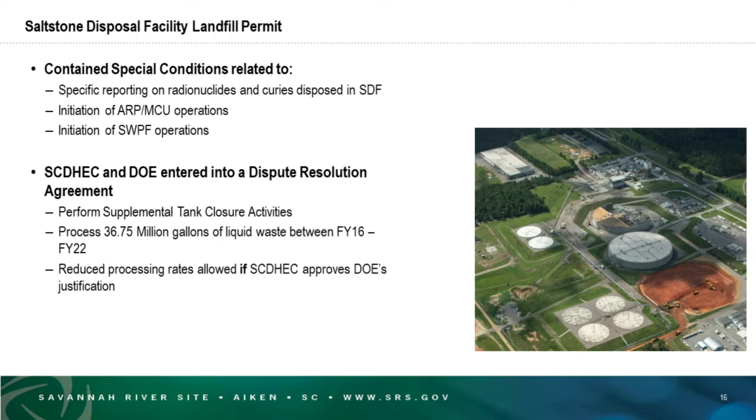That justification process is what we commonly refer to as our force majeure reporting process. Now, force majeure in general industry or insurance terms is basically like an act of God, such as a hurricane or lightning strikes. But for the purposes of our reporting process, force majeures were anything that could significantly affect our processing rates.

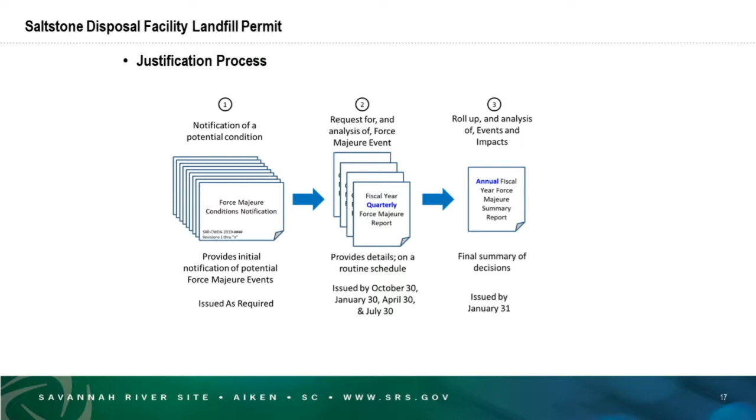Our justification process is basically a three-step process. The first step is where we provide notification. This will be a notification of any justifiable thing that has occurred that could potentially cause a reduction, a pause, or a halt of processing. This could be something from an unplanned outage in one of the steam plants, or a major equipment malfunction that led to an outage where you stopped work to repair the process.

Then we have a quarterly report that we issue in which we may elevate those conditions into specific events. Again, not all of these activities will lead to a pause in processing. Maybe there was an unplanned steam outage that occurred at the same time they were doing some other equipment repair. In that event, we could identify that yes, we notified the regulators that this was potentially an issue, but because we were already paused, there was no need to elevate that particular event.

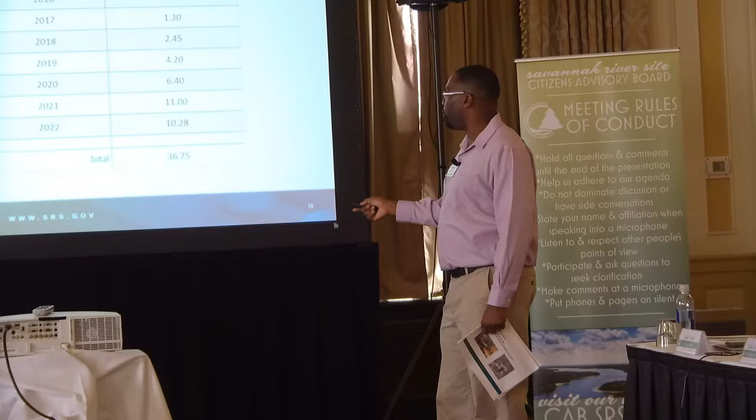As of the end of FY18, so this would be September 30th of 2018, we had an actual production of 1.66 million gallons processed of this 36.75 million, and production impacted 3.14 million gallons.

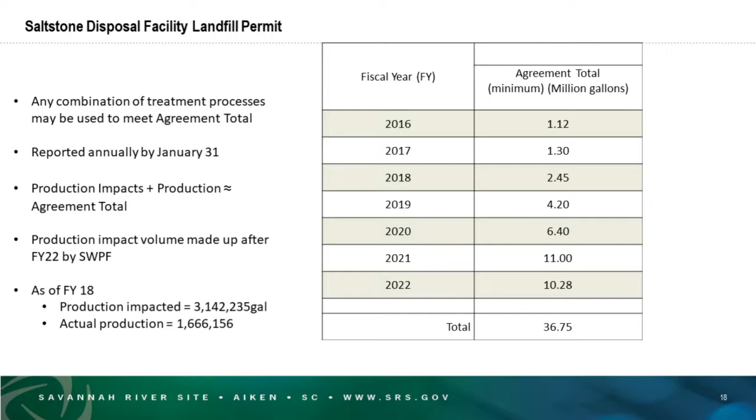Now, to speak a little bit about some of the other regulatory agencies we interact with, we also deal with the Nuclear Regulatory Commission and the headquarters DOE organization, the Low-Level Radioactive Waste Disposal Facility Federal Review Group. Again, one of my most favorite acronyms, the LFROG.

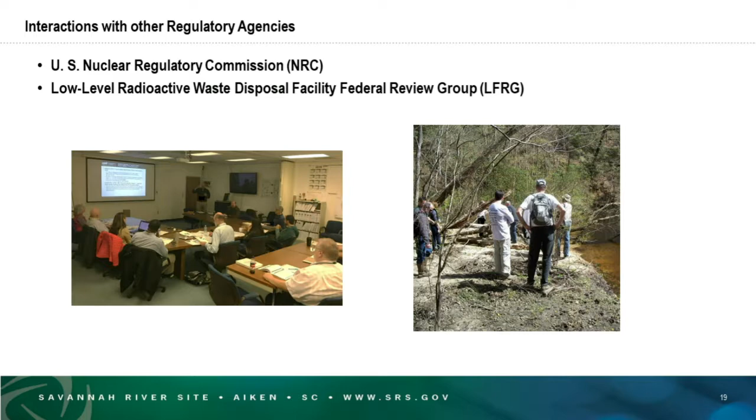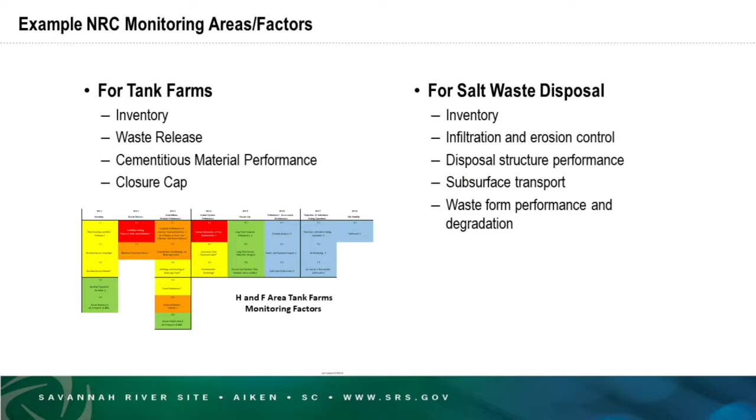So in the arena where we interact with the Nuclear Regulatory Commission, this is all under what's known as the National Defense Authorization Act, or the NDAA, Section 3116, which is part of the process that allows us to treat and dispose of our radioactive waste.

But the NRC comes in and performs monitoring activities to ensure we're doing exactly what we say we're doing and operating safely. I included here a graph of some of their monitoring factors, but primarily the things they're interested in are how we're calculating our inventory, the processes for which that inventory can be released, and some of the processes we're using to describe our closure cap, because the only way that waste will be transported is through water infiltration from the cap post-closure. And that's true for both our tank farms and our salt waste disposal facility.

And finally, the other organization with headquarters is called the LFRG. The LFRG provides regulatory oversight, identified in our DOE order, to confirm the disposal of low-level radioactive waste in all DOE facilities, as well as resulting from tank closures, to make sure those activities are conducted in a manner that is protective of health and safety of the environment.

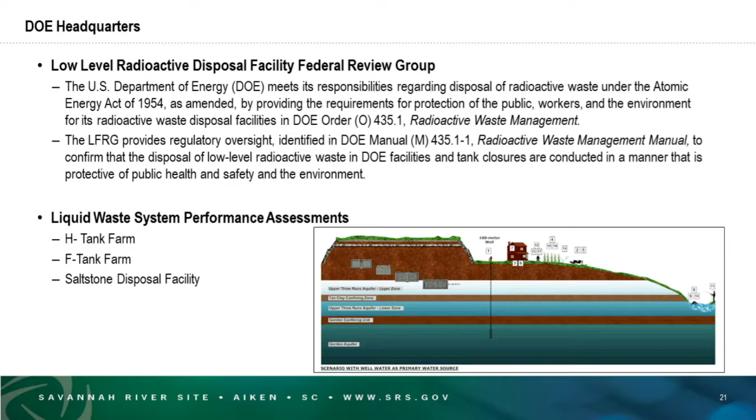Folks, where are we going to start? Doug, let's start with you. Doug Howard, CAB. Great presentation, Mr. White.

Just a couple of questions. The NRC, how often do they come out to the site? Well, they generally come out twice a year. One time they have their on-site observational visits for the saltstone disposal units, and another time for the tank farms. But we have monthly phone calls in which we interact with them as well.

So they don't have a liaison on site at all times? I do not believe that they do. Thank you. Okay, Dan?

Dan Kaminsky, CAB. Going to slide 7, you make a reference on the milestone of tanks 17 and 20. Could you shed some light on what that's trying to say there? I didn't quite get it.

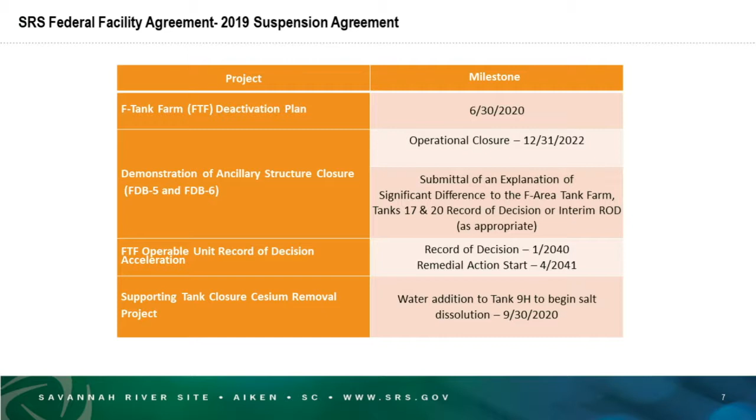17 and 20 are closed, correct? Yes. Again, there was an original dispute. One of the first dispute resolution agreements was associated with an extension request to close those particular tanks. So in that dispute resolution agreement, we set forth a new comprehensive planning schedule for closing the rest of the old style tanks.

Okay, so basically this is the part of the document in the FFA that aligns with that process. So it's just an agreement as to differences of what you did on 17 and 20 versus the next ones?

Well, can I help you out? Yes, okay. So if you look at the tank chart from the last presentation for status, you'll see that for 17 and 20, those tanks were closed in 1997. So the record of decision written at that time covered the closure of those tanks. Then as additional tanks are closed out, we do an explanation of significant difference to include the additional tanks as they are closed. So it's basically added to that record of decision. Okay, so that's what that means.

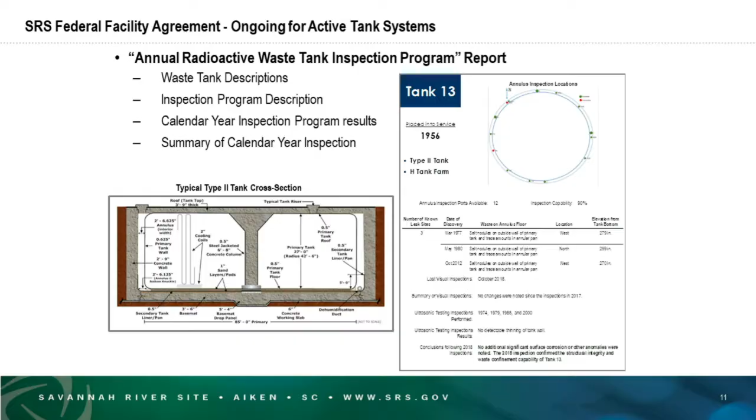On slide 11, you talked about the radioactive waste inspection program, which I love that construct. Is that an inspection program that includes not only the tanks but also the transfer lines, or is it simply a tank inspection program? Transfer lines, as you well know, are a site of potential leak sources, sometimes major leak sources historically. That is correct, and I don't want to steer you incorrectly. I do believe we have inspections associated with the piping system and transfer lines, but I do not believe they are covered under this particular waste tank inspection program report. Okay, I could follow up with you on that, because historically that's where some of the massive spills come from, and that's the issue we're talking about. Understood.

All right, anything further, folks? One more, right on time. Do you still have one, Eleanor? Do you still have a question? Your card, thank you. All right, thank you, folks. Thank you, Aaron, thank you guys.